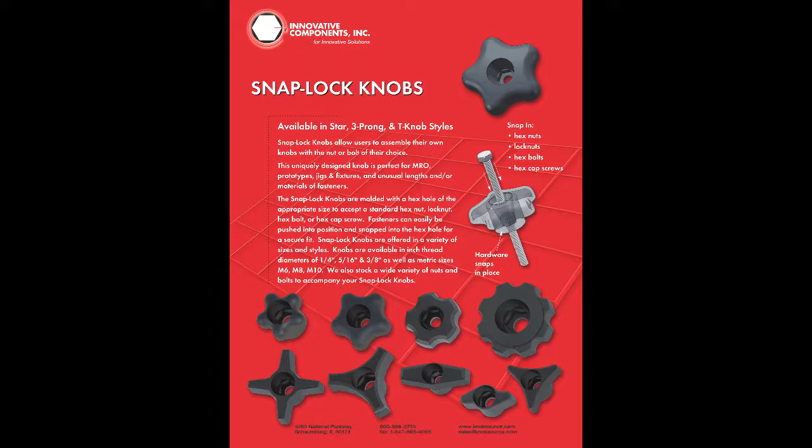Snap lock knobs allow the user to assemble their own knob with the nut or bolt of their choice. This uniquely designed knob is perfect for MRO, prototypes, jigs and fixtures, and unusual lengths and/or unusual materials of fastener that are hard to find pre-assembled.

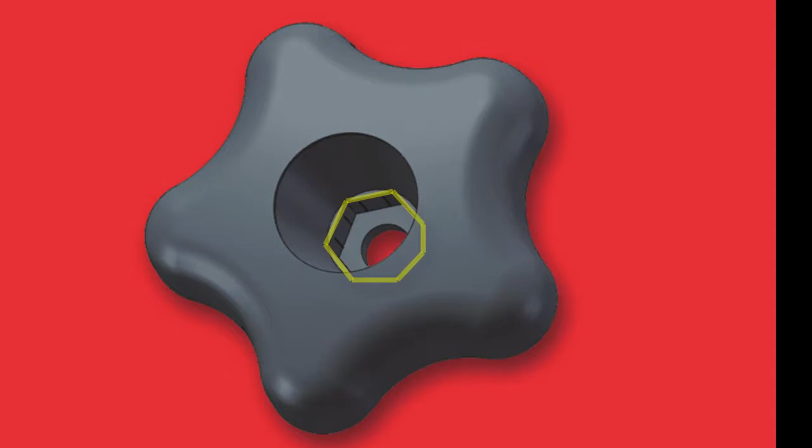The snap lock knobs are molded with a hex hole of the appropriate size to accept a standard hex nut, lock nut, hex bolt, or hex cap screw. Fasteners can easily be pushed into position and snapped into the hex hole of the knob or shell for a secure fit.

Snap lock knobs are offered in a variety of sizes and styles, including star knobs, 3-prong, 4-prong, fluted, and T. Knobs are available in inch thread diameters of 1/4 inch, 5/16, and 3/8, as well as metric sizes M6, M8, and M10. We also stock a wide variety of nuts and bolts to accompany the snap lock knobs. Please refer to the guide.

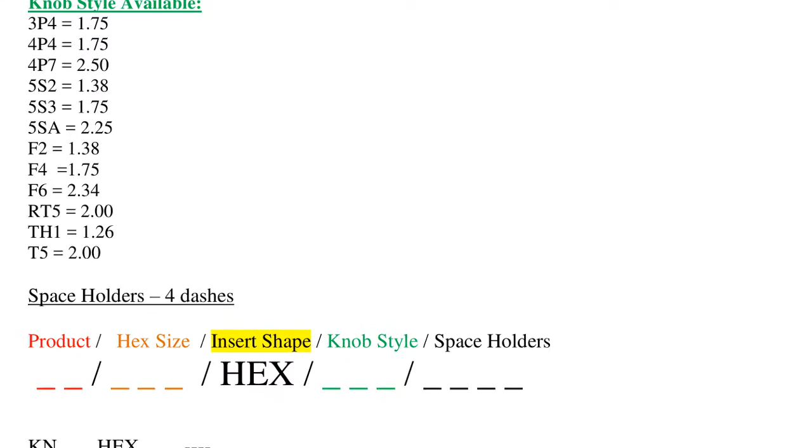Knobs are composed of a 15-digit smart part code. All important attributes of the knob are broken up into categories and listed out on the part code guide. Follow the color-coded guide to translate the description into an Innovative Components part number. Located at the bottom of each guide is a layout of the smart part code. Use this to help guide you when creating a part code.

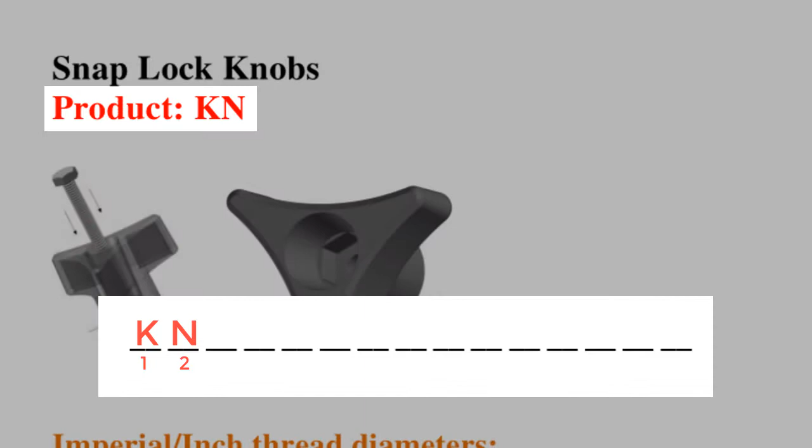To start, we identify the product code, which is a 2-digit designator taking up the very first 2 spaces of a part code. Snap lock knobs will start with KN. KN stands for knobs. Next, we move on to the orange section, labeled imperial, inch, or metric thread diameters.

This attribute refers to the thread diameter or hole size within the knob. In fasteners, a hex shape is always the same size for each thread diameter. All thread diameters will be listed within 3 digits in spaces number 3, 4, and 5 of the part code.

Each diameter has an associated hex number, or H number translation. The H stands for hex, so an H1 means you can snap in any 1/4 inch diameter bolt or nut. A number 10 hole translates to an H10. If the designator is only 2 digits, such as H1 or H2, we put a dash in the 3rd place, taking up 3 spaces for this attribute.

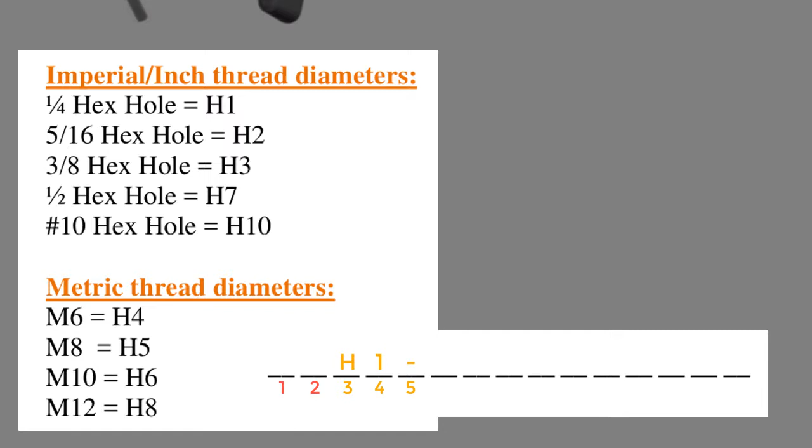Next, we move on to the yellow section called Insert Shape. Insert Shape is made up of 3 digits, taking up spaces number 6, 7, and 8. We will always, 100% of the time, automatically enter the term hex in this spot for snap lock knobs.

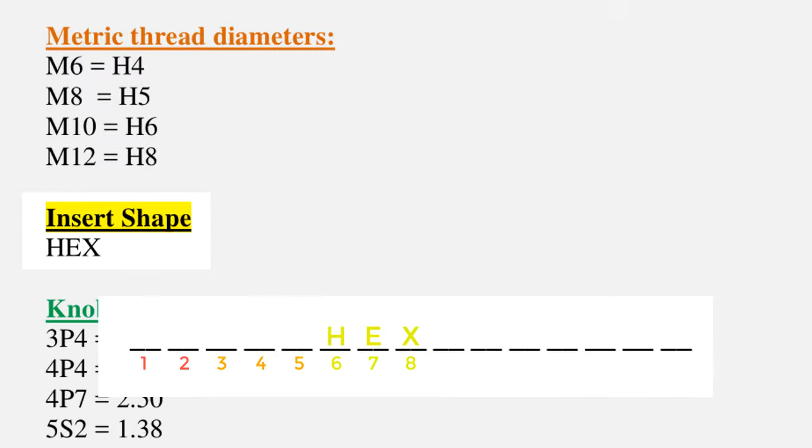Next, we move on to the green section called Knob Style. This section is listed in spaces number 9, 10, and 11 of the part code. Knob styles are either 2 or 3 digits. In cases where there are 2 digits, we use a dash in the 3rd placeholder of any knob style.

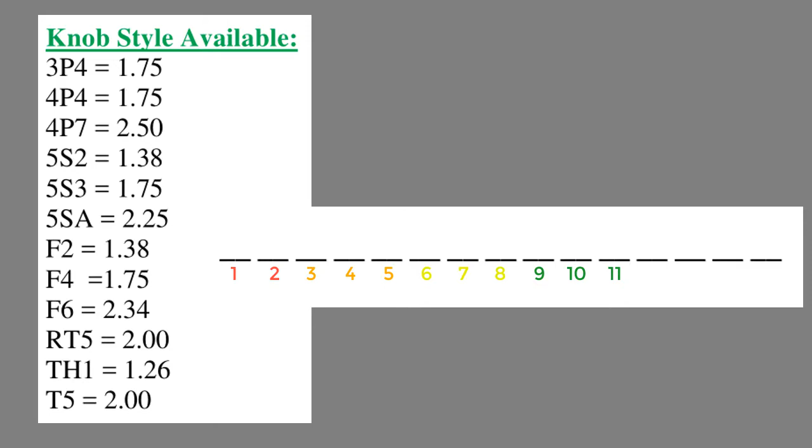The knob styles listed are our stock standard sizes in which we always keep stock in various thread pitch. If a customer wants another style that is not listed, we could certainly do it, but we have not done it in the past, and there would be tooling charges to manufacture a new size in a snap lock knob.

Lastly, move on to the placeholder section where we simply enter 4 dashes into the part number. Now that we know how to use the part code guide, let's move on to the practice quiz and put it to use. Snap lock knobs quiz.

Number 1: 1.38 fluted knob with a number 10 molded in hex hole to accept a push-in. First, let's identify the product code. The product code is KN for knob. Next, we move on to the hex size. This description says number 10 molded in hex hole, so we look at the orange imperial inch thread diameters. We find a number 10, which translates to an H10, and an H10 is what we put inside the hex size. So it should say KN H10.

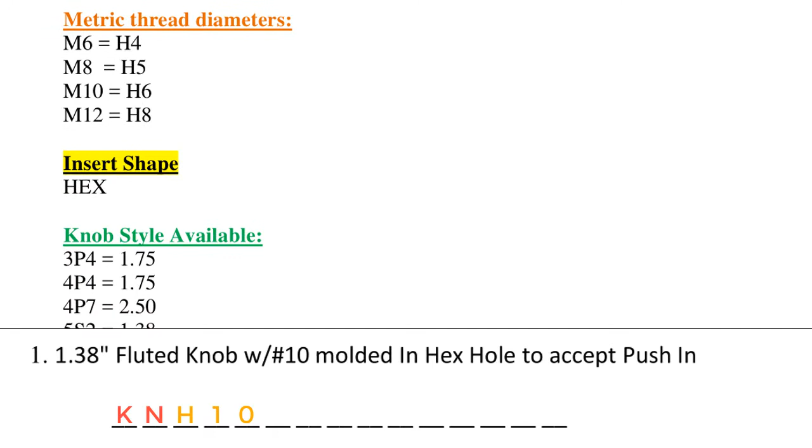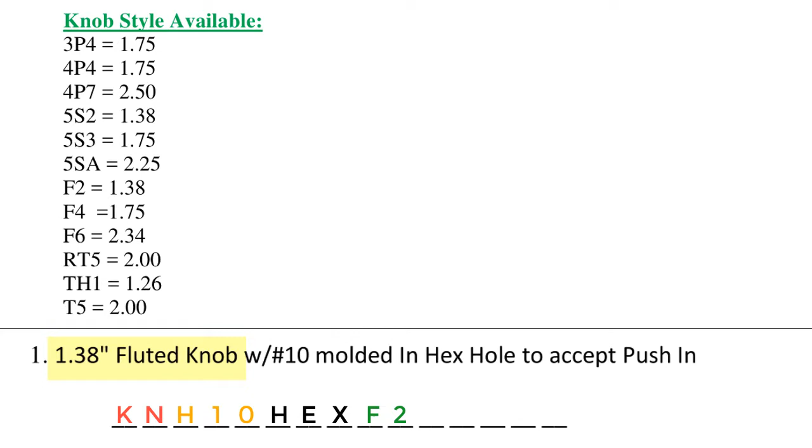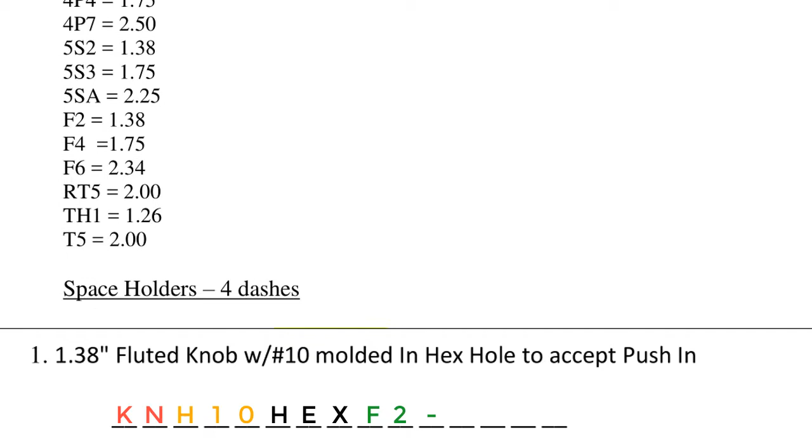Then next we move on to the insert shape, which is an automatic HEX. Following the insert shape, we look at knob style in green. Knob style is 3 digits long. This particular description says 1.38 fluted knob, so we look down our knob styles and we see an F2 for fluted equals 1.38. So the knob style will be F2 and then a dash. Anytime there are only 2 digits for the knob style, we put an automatic dash in the 3rd placeholder. Next we have our space holder section, and this is automatically 4 dashes. Our part number will read KN H10 HEX F2 dash dash dash dash.

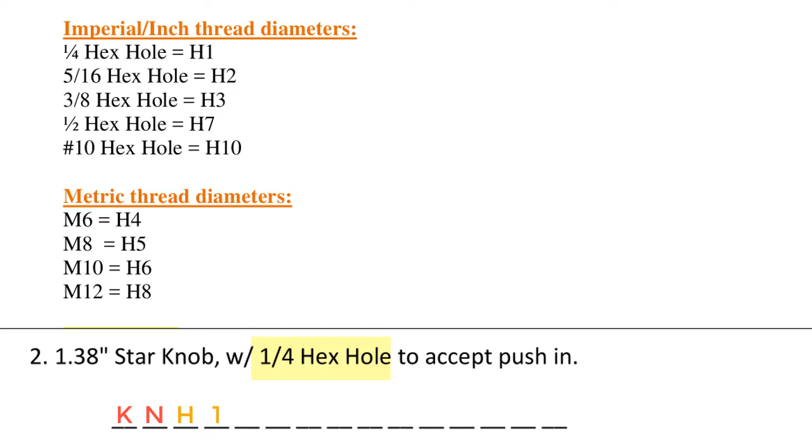Number 2: 1.38 star knob with 1/4 inch hex hole to accept a push-in. First we identify the product code. Product code is KN for knob. Next we identify the hex size. This description calls out a 1/4 inch hex hole, so we go to the imperial inch thread diameters, find a 1/4 inch hex hole, and see the call out for that is H1. In this case, since we have 3 placeholders available, we put an H1 dash.

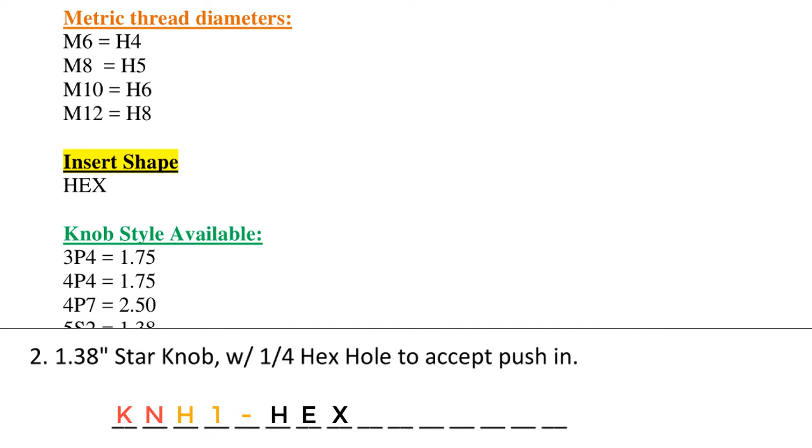Next comes an automatic hex for insert shape. So far we have KN H1 dash HEX. Then we come to the knob style in green. Number 2 says 1.38 star knob, so we look at the knob styles available, and the 5S's are your star knobs. So the 1.38 star knob is a 5S2. We place 5S2 in the 3 digits available for knob style, followed by 4 automatic dashes in the spaceholders area. That part number calls out KN H1 HEX 5S2 dash dash dash dash. Let's take a look at number 3.

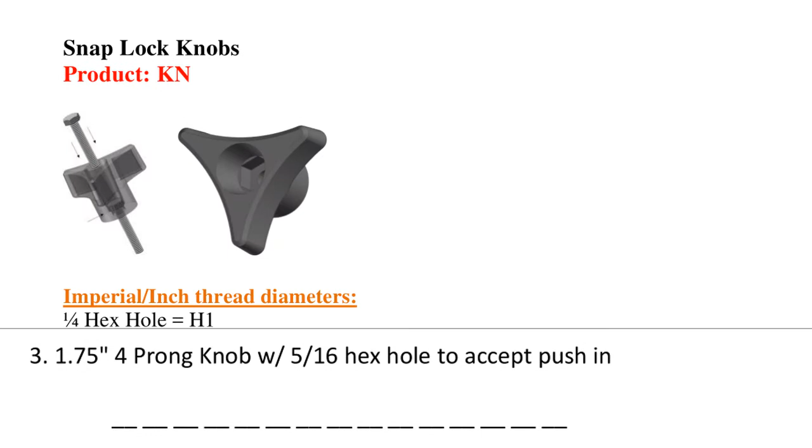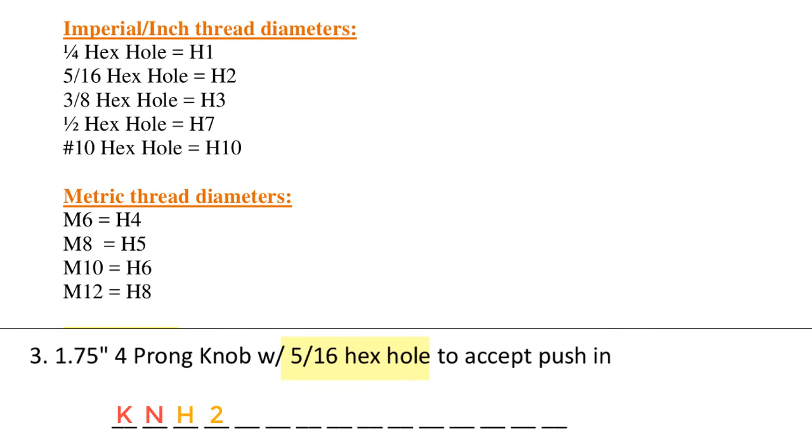1.75 4-prong knob with a 5/16 hex hole to accept a push-in. First we identify the product code, that's KN. Next we identify the hex size. This says 5/16 hex hole, so we go to the imperial inch thread diameters, find 5/16 hex hole, and see that it translates to an H2. Because it only has 2 digits, we put an automatic dash in the 3rd placeholder. So far we have KN H2 HEX.

Next we identify the knob style. Number 3 says 1.75 inch 4-prong knob. Your 4 prongs start with 4P, so we find the 4P that's 1.75 inches in diameter, and that's a 4P4. We place 4P4 in the 3 placeholders available for knob style, followed by an automatic 4 dashes. This part number call out is KN H2 HEX 4P4 dash dash dash dash. Please complete number 4 through 10 on your own.